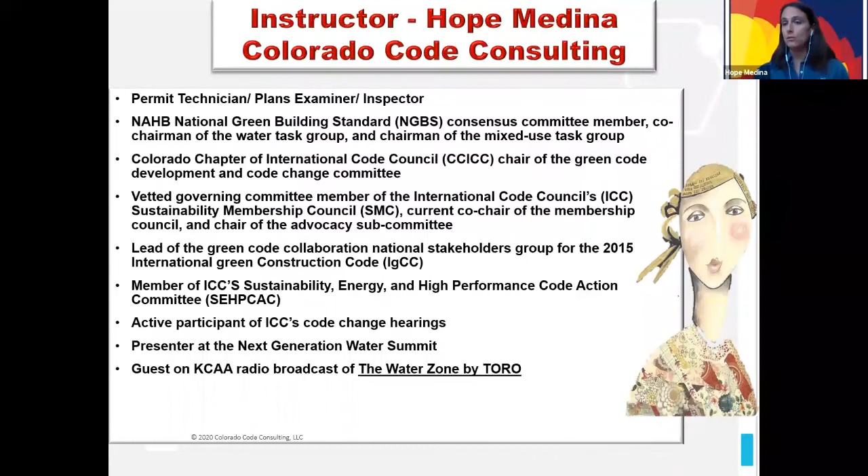So one thing I want you to keep in mind is the energy code really tries to get you to where you need to go. They try to create a pathway for you to get there. For that to happen, you have to make a decision as far as which energy compliance path you want to utilize for this project, because so many things are going to depend on what your choices are as far as the energy compliance path. Now you have a few options: your true prescriptive, your component alternative, and your performance path. And then you have the option that if you utilize ASHRAE 90.1, the 2016 version, then you are deemed to comply with the 2018.

Now, why is this so important? Because you as the architect are kind of the gatekeepers to these projects. You have to help facilitate the owner's dream or desire of what these buildings are going to be. But in doing so, you also have to juggle the other people involved—your engineers working on the MEPs, your soils guy, everybody involved with the project. You're kind of that gatekeeper, juggling to make sure that whatever the owner's desire is for this building, you can get it built under what the codes are, whether it's the building code, the energy code, whatever the case may be.

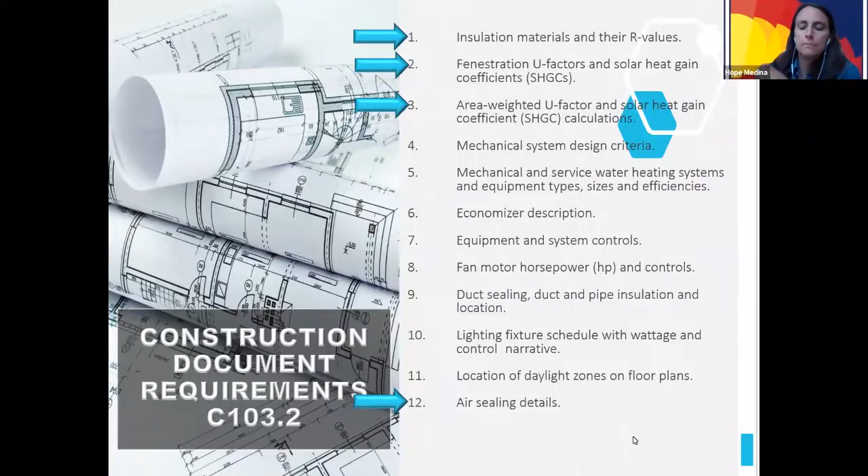Another one is your thermal envelope. I cannot tell you how many times I have to call this out. I've actually had responses back from architects when I've made the comment, please define your thermal envelope. I should be able to take my finger and trace it without lifting it.

I've had responses come back and say, well, it's all the exterior walls, and which would be fine. By code, you have to show it on the plans, and it's been in there since the 2015, and many jurisdictions actually amended it to be into the 2012 editions of the IECC. But there are some other provisions that come into play with it.

I don't know if you're aware, but mechanical rooms, if there is mechanical equipment in these rooms and they have outside combustion air being brought in, there's a few things you have to do. You may have to thermally isolate the room, or have it located outside of the thermal envelope. So knowing exactly where that thermal envelope sits becomes important.

One of the tips I'll tell you: often on that back wall is where the mechanical room is located, or in the corner, or what have you. Put a little note that says mechanical room, and then under it say no combustion air. That will do wonders for you in plan review, I'm going to tell you.

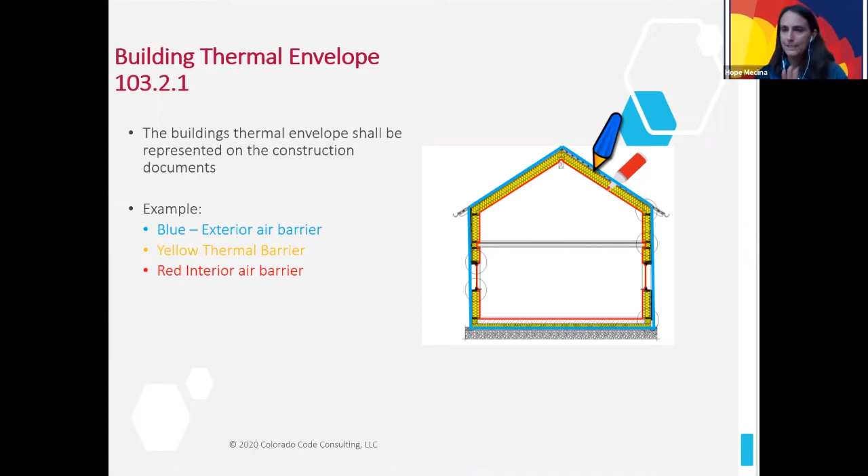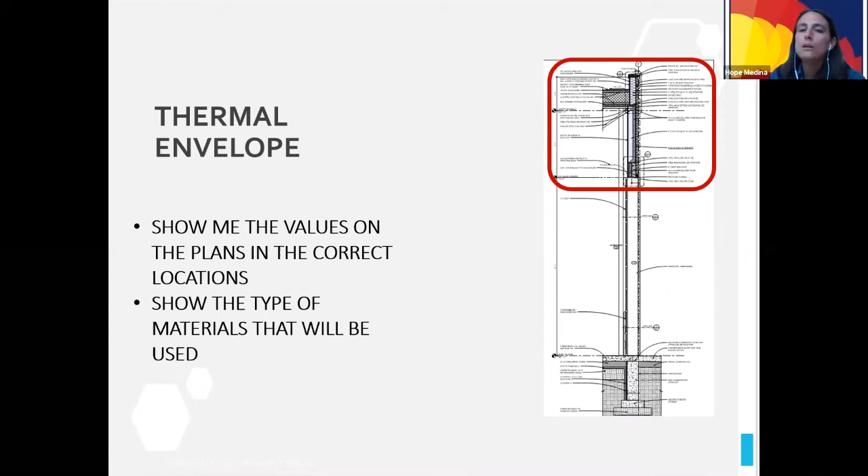So as we stated earlier, tell me what you're putting in for your thermal envelope. Tell me what the values are, make sure that they're in the correct location, and show me what type of materials that you're utilizing.

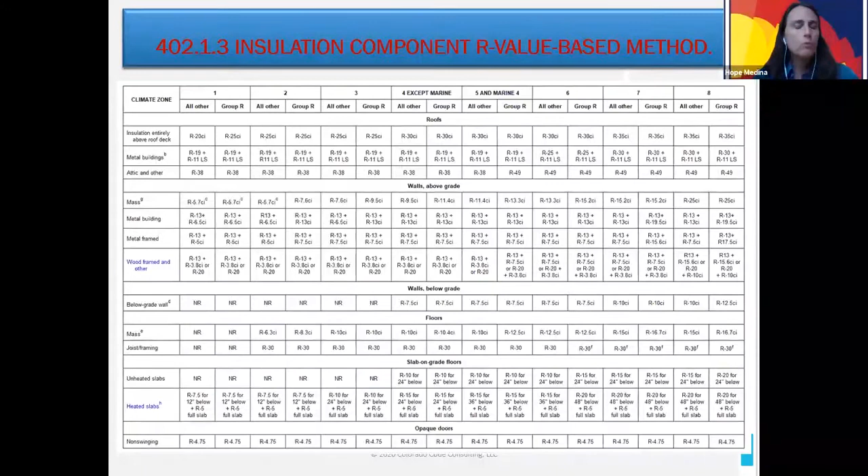So this is the table that all of the compliance paths and so many provisions within the energy code point to. Basically, this is your jumping off point right after you figure out which compliance path you're going to use. But to understand this table, we need to understand how it's set up.

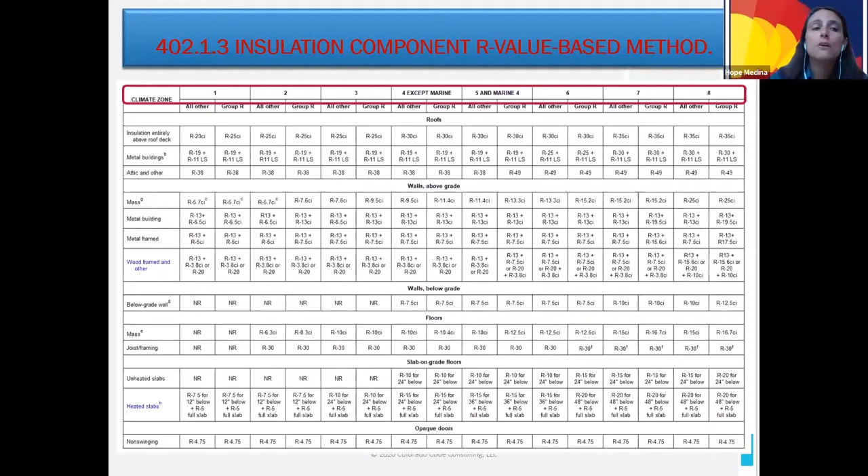The first thing you're going to notice is everything is determined by the climate zone. Which column you look at, how you're going to deal with things, whether you fall under exceptions - everything is done by the climate zone.

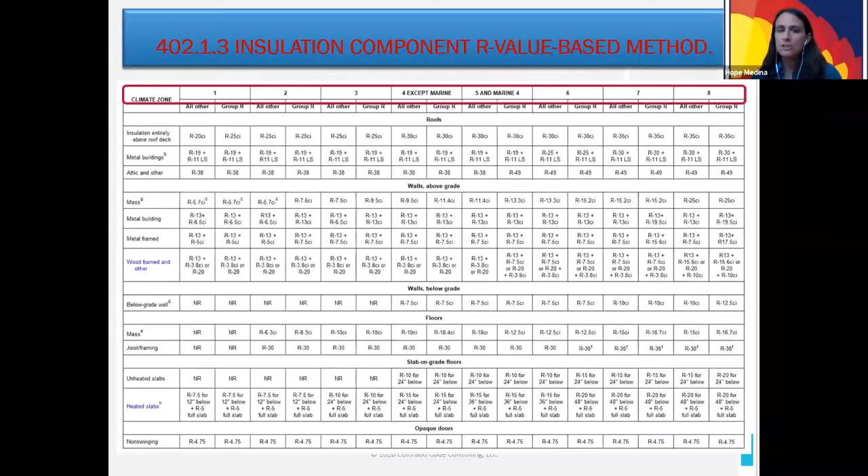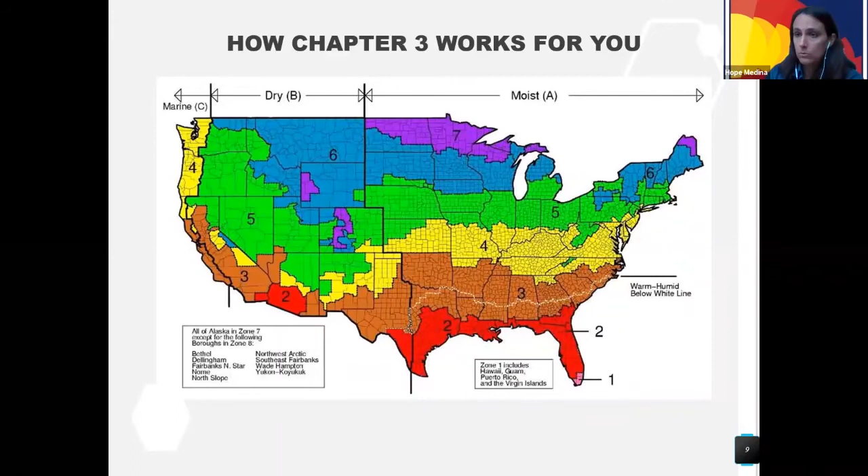So then what you're going to do is flip the page over, find the state, and figure out which county this particular city is located in. So if it was Alamosa, Alamosa County, you know that they're going to be a 6B. So now you know you're going to be looking into the 6th column.

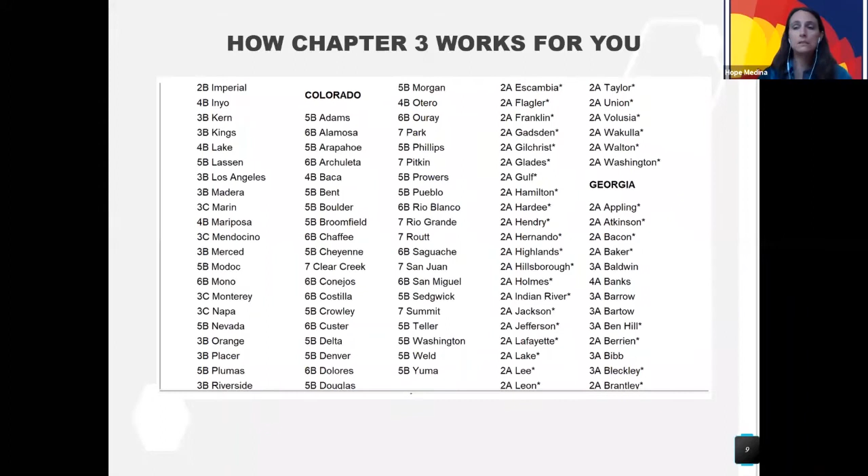So again, we have our climate zones, and then our climate zones are broken up into 2 more columns. We have our group R column, which is all your R occupancies - R1, R2, R3s, R4s - and then you have all other. So now you know you're in climate zone 1, it's going to be in R2, so this is the column that you're going to have to take a look at.

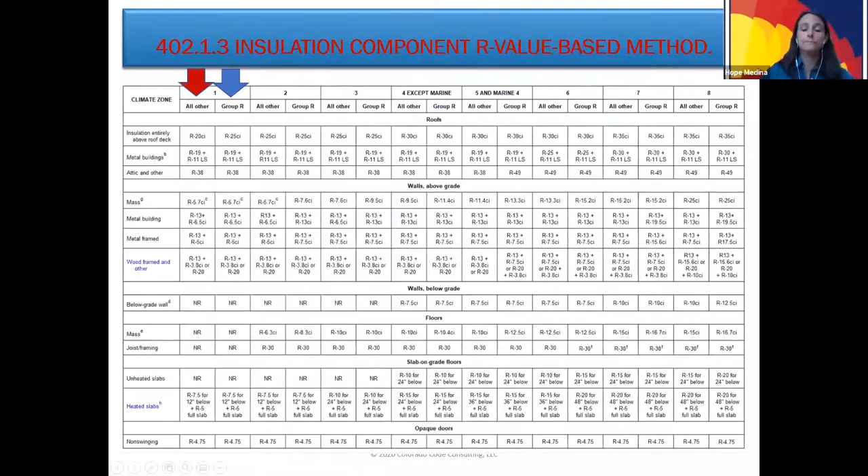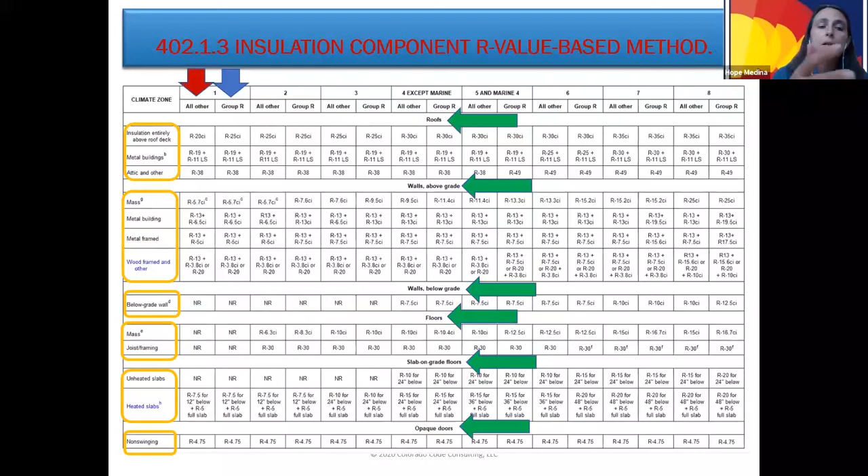And then it's broken up into very specific categories. So you have your roofs, you have your walls above grade, walls below grade, slab on grade, and opaque doors. And then it goes into even further information that starts to deal with the specific types of components that are in this type of category.

So if we took a look at the roof category, entirely above deck for a climate zone 5, you're going to be dealing with a minimum of R30 continuous insulation. Now, one thing I want you to keep in mind, if you do choose to go prescriptive - and there's absolutely nothing wrong with going prescriptive - you have to do everything that's listed in this table, and these are the minimum requirements for it.

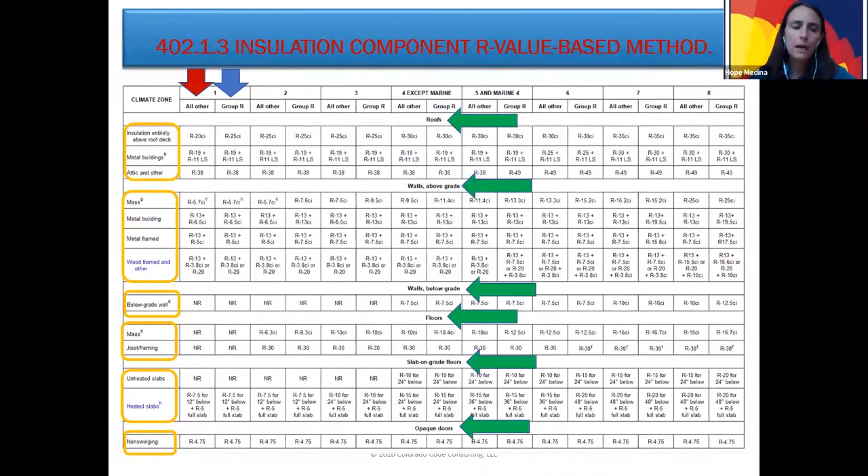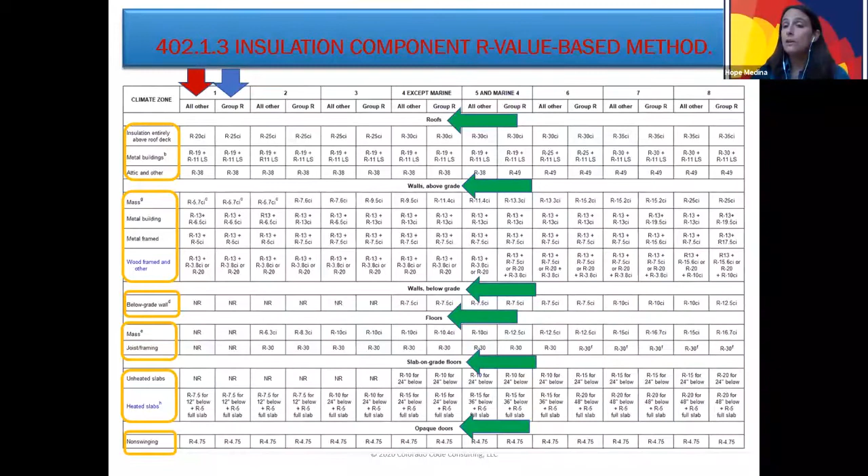So that means things like slab on grade - you can't trade off slab on grade if you're going prescriptive. So just keep that in mind when you are thinking about what type of energy compliance path really makes sense for your particular project. All right, now we're going to run into some of the actual provisions and what's the big hitter about them and what's the big deal about them.

So the first one we're going to talk about is our above grade wall insulation. I think everybody probably thinks about the pink in the wall and knows what it is, but there are a lot of things that can be involved with it.

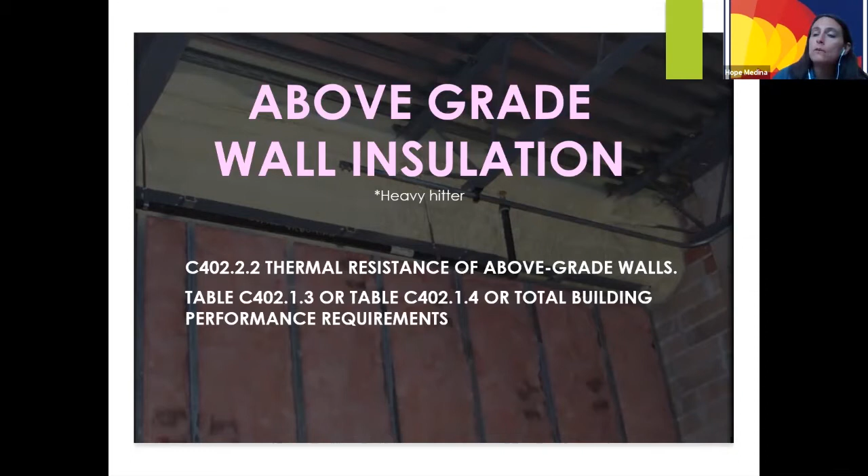You're going to want to make sure that you have your insulation values on your plans and what type of insulation that you're going to use, and make sure that it correlates with whatever compliance path you have. All this information needs to be provided to your mechanical contractor or mechanical engineer.

Because they're designing the mechanical systems to the values that you have within your thermal envelope. This is where it makes a big difference. It's not the actual insulation in the walls that saves the energy, it's part of the process for it. It's the mechanical work that's going to save the energy.

So if that mechanical equipment is sized appropriately, because there's actually a good thermal envelope involved, this is where you're going to start to see those energy efficiency components come in. This is why it's so important that the actual thermal envelope values not only are placed on the plans, but passed along to all the various entities involved, because this can make or break the type of mechanical system that's going to go into particular projects.

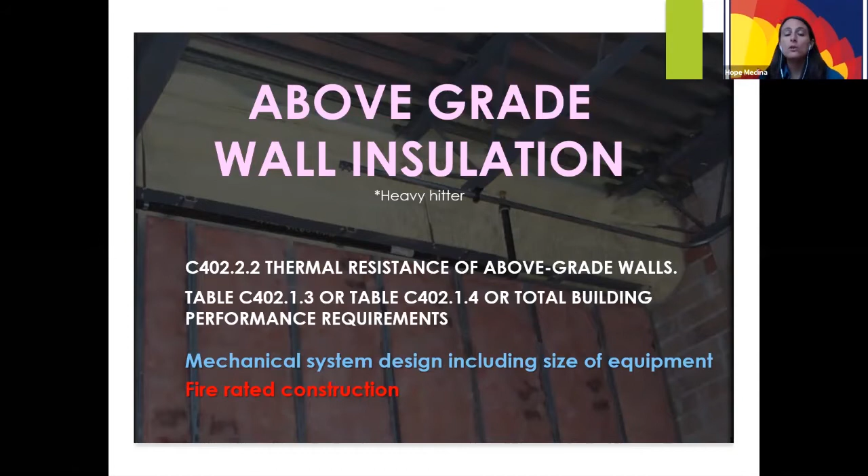And you have to remember too, this information becomes very important, especially when you start talking about fire rated construction. So let's talk about and look at what's involved when it comes to the above grade walls.

Now the table that you see on the top of the screen comes out of the R value table. The values that you see on the bottom are your U factor alternative approach, meaning that you're going to utilize the entire assembly to get to that U value and not just the insulation that's in the walls.

So if you notice, looking at the table at the top of the screen, they all say an R13, and then let's go to the very first column, it says an R5.7 CI. Now CI means continuous insulation for these mass walls. If you go to the metal building, it says an R13 plus an R6.5 continuous insulation.

If you notice, all of the above grade wall types are required to have continuous insulation involved with it. So if you go truly prescriptive, you are going to be required to utilize that continuous insulation requirement for your wall assemblies. Now there are a couple of options where it does allow for an R20 cavity.

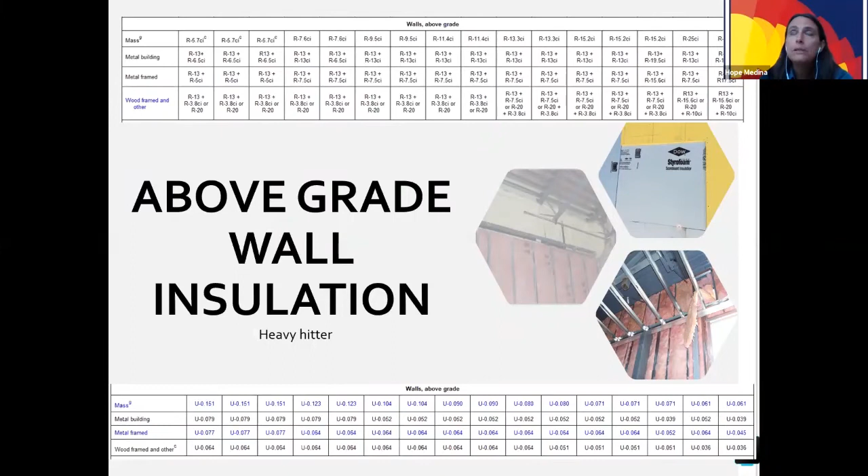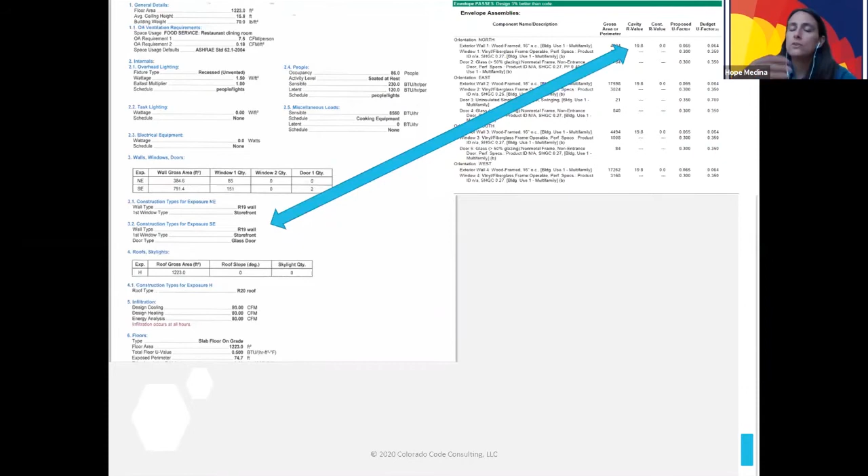And I believe that those will be removed when it comes to the 2021 code. But as you can see here, I wanted to give you an example. On the right-hand side, you'll see a very typical COMcheck that gives you the information as far as what you're putting into your thermal envelope.

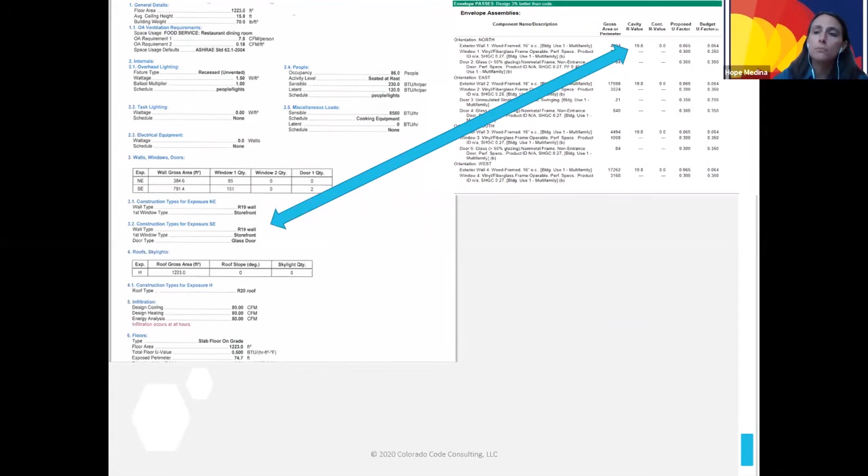And then it correlates over here on the left-hand side to what the mechanical contractor put in when they were doing their mechanical load calculations. And that determines the size of equipment that they're going to install for the particular project.

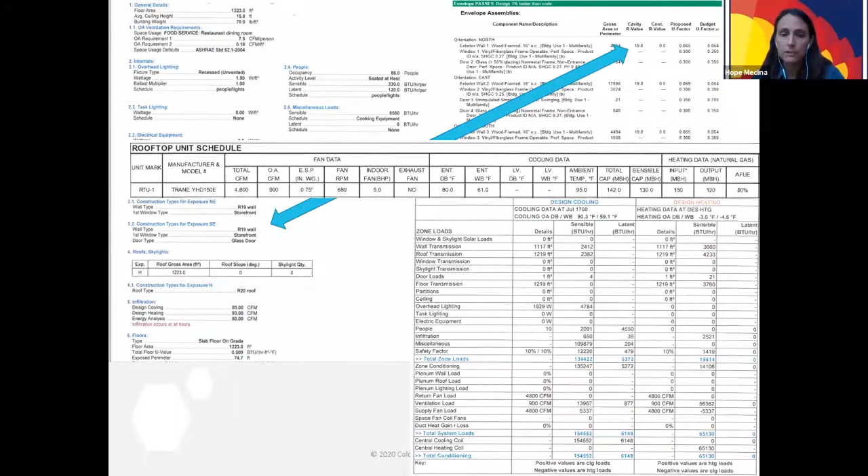Now, I mentioned to you earlier about fire rated construction and the thermal envelope, and the importance of this is, a lot of times people think that if it happens to be construction dealing with fire rated walls or fire rated assemblies, whatever the case may be, that the energy code loses out, that life safety supersedes the energy code.

And yes, the energy code is not allowed to abridge life safety, but that doesn't mean there's a complete exemption or doing away with anything you can do when it comes to fire rated construction. If you notice, on most listings for fire ratings, it has in there to utilize a minimum R13 batt insulation or something along those lines. There's usually a minimum of 3.5 inches or whatever the case may be.

You can incorporate that into your thermal envelope and you can still utilize it. You can go in there and say, it says a minimum of R13, so you decide we're going to put an R20 in the wall. Well, that's great, but if you don't put it on your plans, that wall is not going to have an R20 in it.

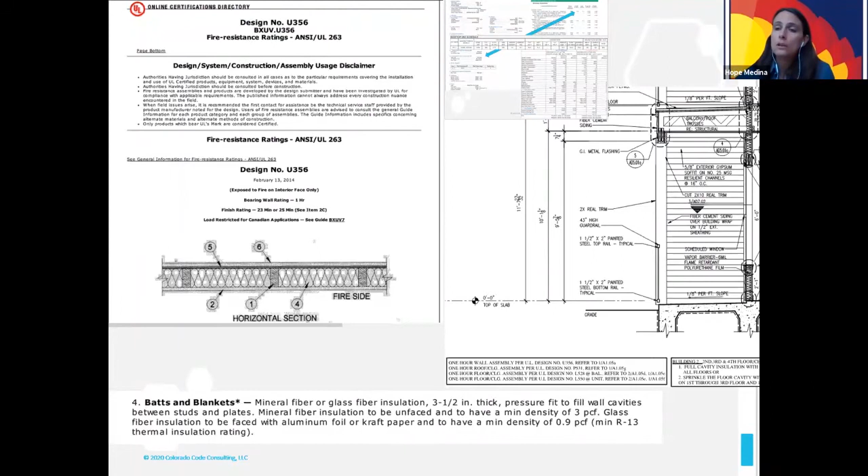What do you think the contractor puts in? They're going to put in an R13 because that's what the fire rated construction listing states—a minimum of an R13. It says R13 there. There's nothing on the plan, so I'm assuming we're going with an R13.

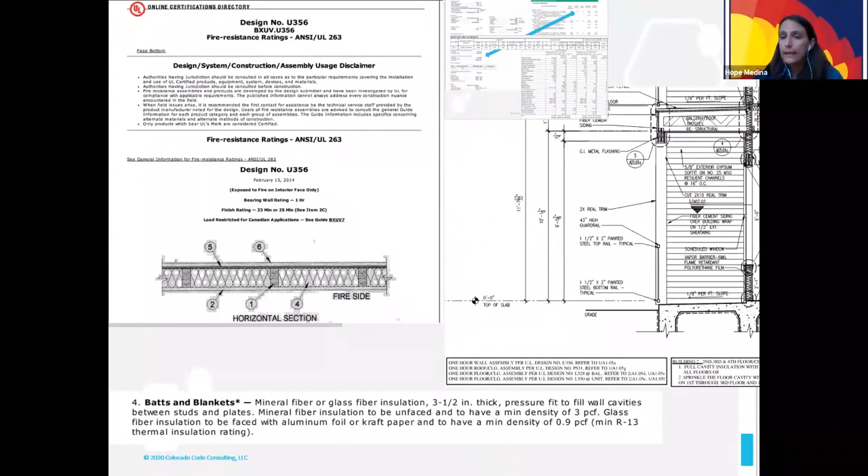Now, if you remember from the previous slide, the mechanical contractor did their mechanical load calculations for an R19. So now they may have sized their equipment incorrectly, and it won't actually perform the way it's supposed to, and it won't heat the building as it should. Just by one little omission, you can cause some snowball effects from it.

Roof insulation is a really big heavy hitter because, if you think about it, it either keeps the heat in or keeps the heat out. It is a really big, important heavy hitter, and so you need to know what it is that you're going to be utilizing.

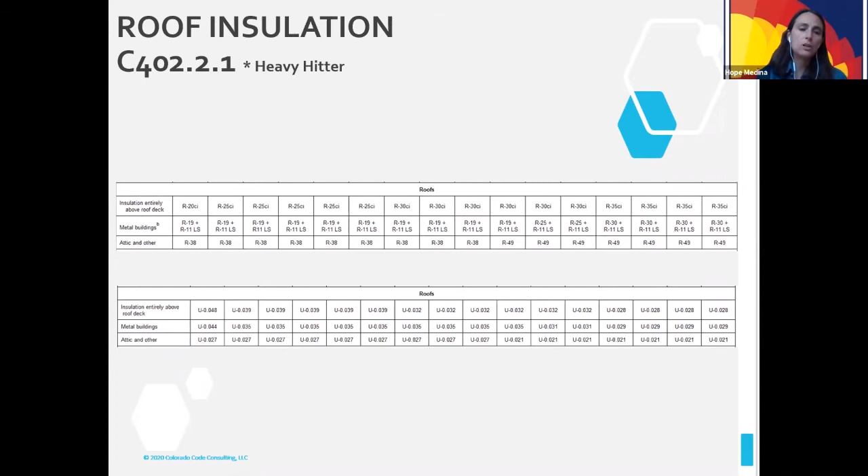So are you doing entirely above deck? Is this going to be a metal building? Are you putting it in the attic, very typical to what you'd see for residential applications? Whatever it is, this information needs to be placed in there.

Now, roof insulation has to meet the minimum values that you're going to find in there. And if you're utilizing multiple layers, you need to make sure that the joints and seams are staggered so that there isn't heat loss always at that same line.

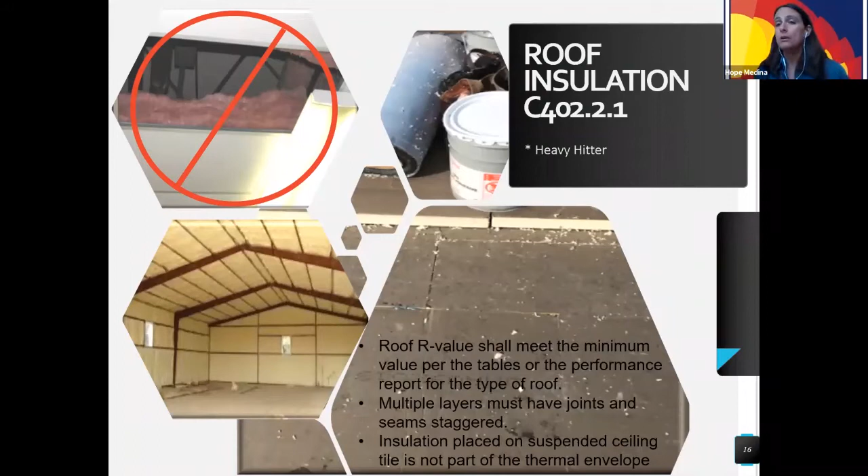And you need to keep in mind that insulation placed on top of suspended ceiling tiles is not going to be considered part of the thermal envelope. Now, you can have them there—there's nothing wrong with having them there. And quite often they get placed there, especially if it happens to be above a restroom, because nobody in the office next door wants to hear the toilet flushing over and over again. So that's not unheard of, but just realize that's not going to be considered part of your thermal envelope.

And keep in mind too, if you're going prescriptive and it's for a metal building, there are a few additional things you're going to have to keep in mind. You are going to have to utilize a liner system, and you're also going to have to utilize thermal blocks, and that information needs to be placed on the plan so that everybody is fully aware of it.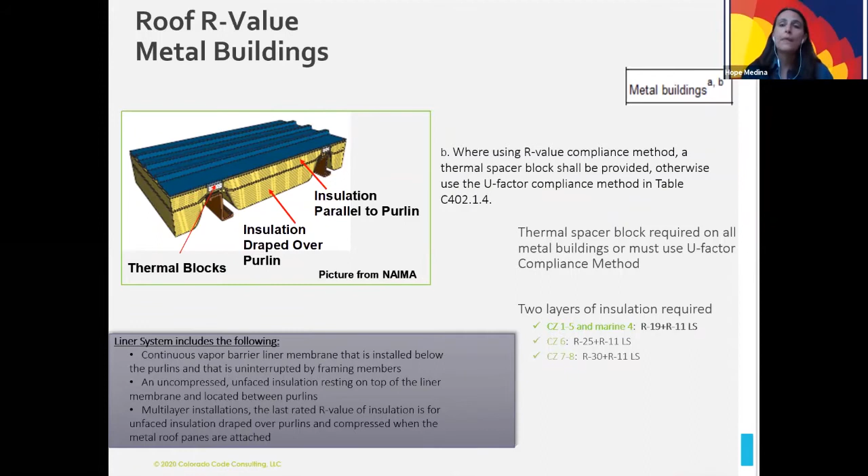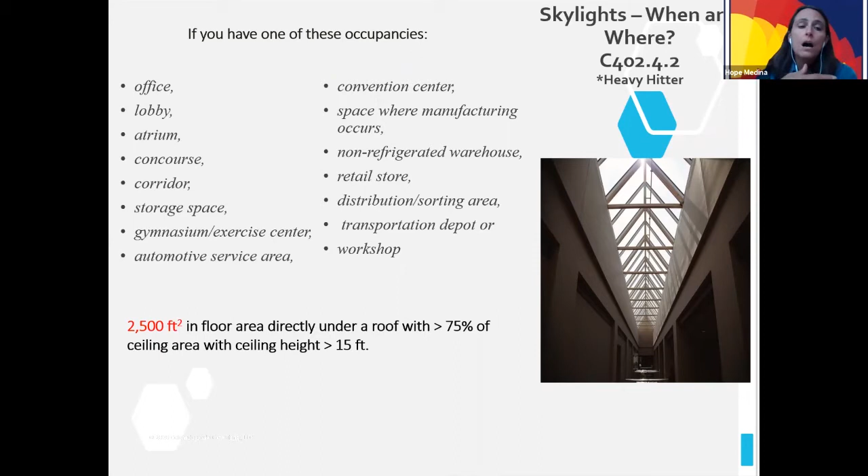And skylights—since we're already in the roof area, let's take a look at skylights. Skylights changed so that it is now required if the room directly under it has a ceiling height of 15 feet and it's at least 75% of that area, and that area happens to be 2,500 square feet, you're going to be required to have skylights in it. So the occupancies where you'll be wanting to install these are offices, lobbies, atriums—the whole gambit list you see up there. So that's something to be aware of.

You have to start from the top of the slab and extend down to the accepted distance or to the top of the footing, or your other choice is to start at the top of the slab, go down to the bottom of the slab, and then go horizontally for the remaining distance. But those are the ways it needs to be installed. Or you can place it on the outside of your foundation and place it there also.

Now, one of the questions I get is, well, there's a concern about placing the insulation between the slab and the foundation wall. And if you look at the soils report, or sometimes it's on the structural plans themselves, it'll say that there needs to be a control joint. I've talked to some engineers and they've said, yeah, you can totally use that as your control joint in those locations. Of course, I'm not advocating or superseding what your engineer is saying, but I have spoken to a few and they've said that in these types of situations, it's perfectly acceptable to utilize that.

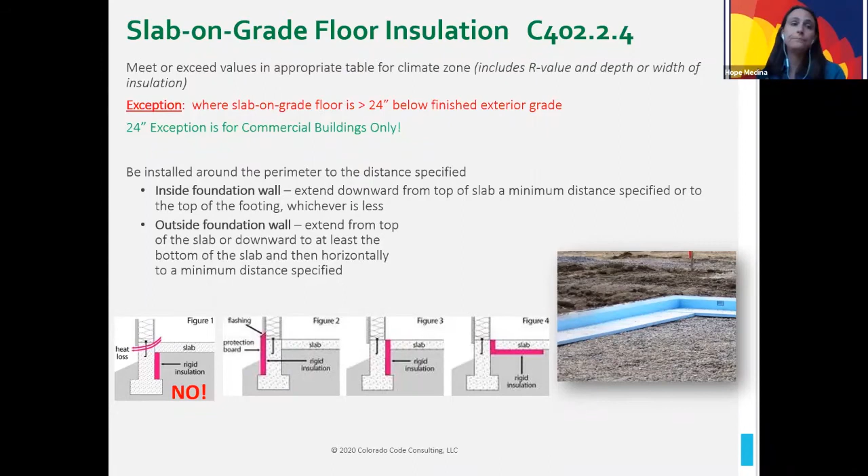Fenestration. Glazing is a huge factor when it comes to energy efficiency. And there's a lot of things that kind of wrap around when it comes to the fenestration requirements.

There's so many factors that are actually going to be determined with it. The location of where these windows are placed in the building and what they're facing is going to determine your solar heat gain coefficient requirement. So orientation is going to matter, and you need to make sure that that ever so lovely north arrow that's required by code to be placed on there is there so that everybody's able to determine it.

And then it's your projection factor that's also going to come into play with it. So if you have a projection factor of 0.2 and it's facing north, for climate zone 4, your maximum is going to be a 0.48. So these are things that are going to be important.

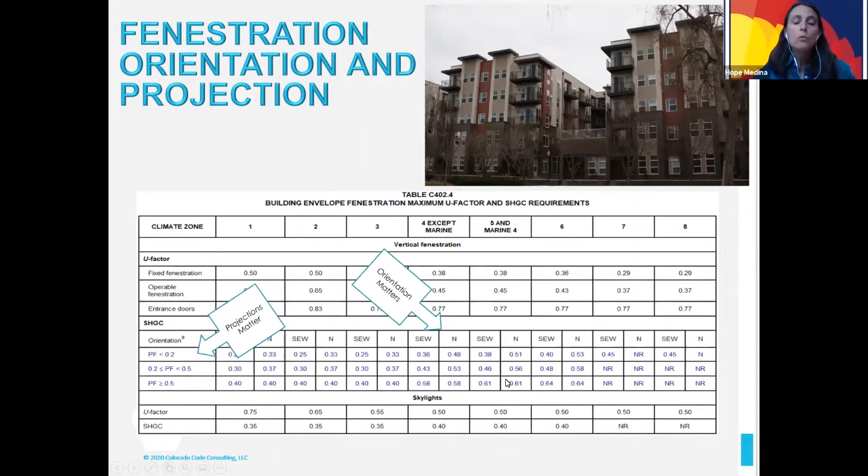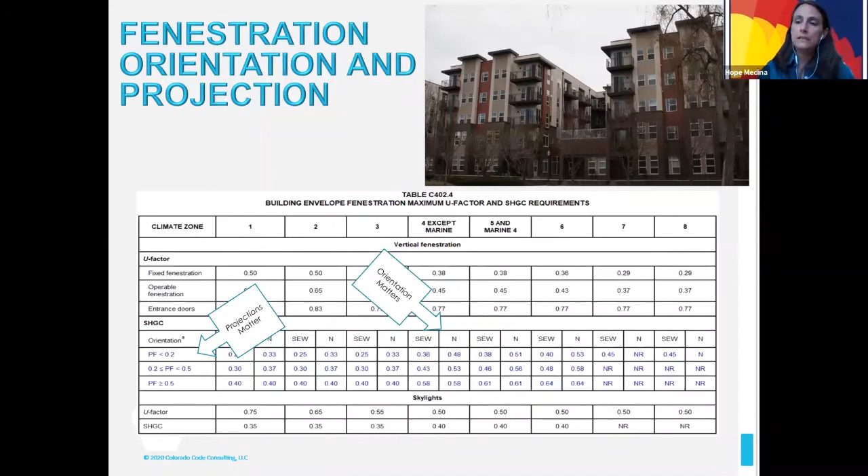What I can tell you is code officials are a lot more aware of the projection factor issue and making sure that they're getting the correct information as far as what the solar heat gain coefficient will be. Now I've seen where they take the most restrictive, we'll say for climate zone 4, the most restrictive is going to be the 0.36. So I've seen where it's placed on the plans that the maximum solar heat gain coefficient for any window is going to be a 0.36. Even though it's not very specific, at least I know that we're not going over that.

Just so that everybody is completely aware of how to determine the projection factor, you're going to take the bottom of the glazing to the underside of the projection or the overhang, and then you're going to take from the face of the glazing out to the edge of it. And the horizontal is then divided by the vertical, and that's going to give you your number.

So if A happens to be 30 inches and then B happens to be 84 inches, we're looking at a projection factor of 0.36.

Now, like I said, because code officials are more aware of this due to all the training that has happened in the last 6 months with our lovely situation of dealing with COVID, don't be surprised if you get asked about what your projection factor is for some of your glazing. That may be something that comes up.

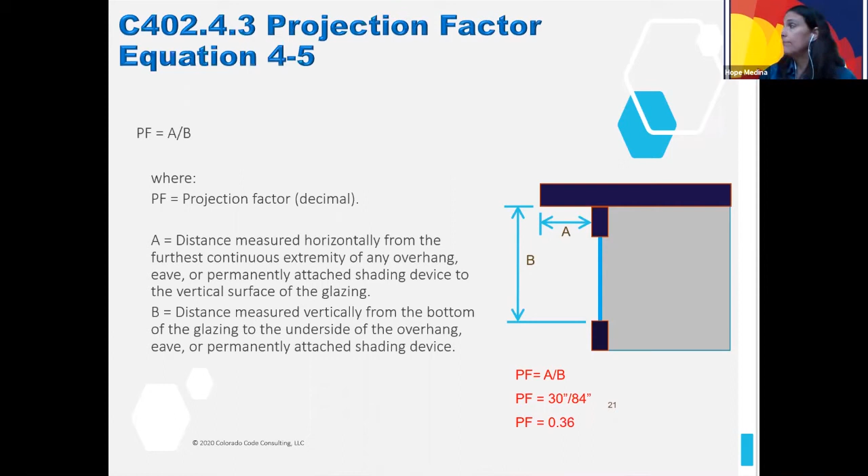Another thing to be aware of is when you're submitting plans, provide the NFRC labels so that they can determine whether or not the framing and everything is going to be within code parameters.

The other item that you need to make sure of is about your glazing leakage. This happens to be one of my biggest pet peeves, and some of my local restaurants know me quite well and know not to place me at a window because their air leakage is so crazy that there's no reason I should be sitting there with the blinds moving from the amount of air that's coming in just from the air leakage. So please be aware that you need to have this.

The question becomes, do you place this on the plans or do you place this in the spec book? A lot of times I hear, well, I place that information in the spec book, and there may not be anything wrong with that.

What I find in the spec book often is just a lot of boilerplate information. It's not even necessarily specific to the project. And what I often have to call out is that because these don't get looked at and updated often, the information in there, like for your piping insulation, goes back to the 2009 requirements and is not to the '18 requirements that were changed.

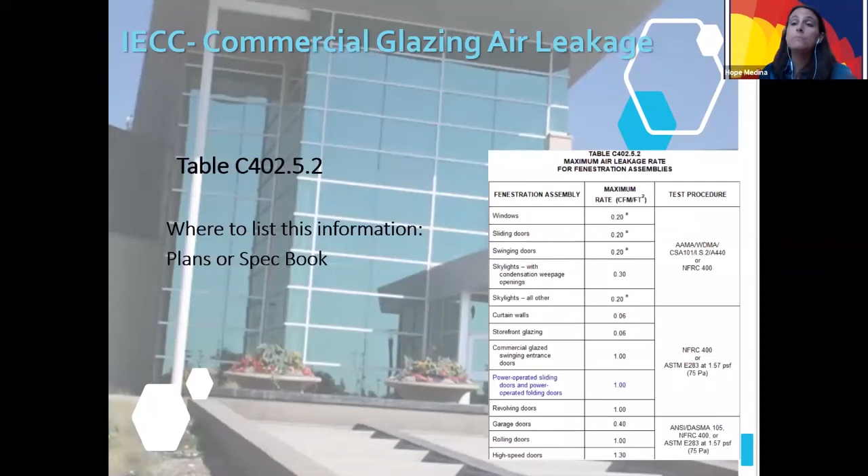There are a few other things I've noticed consistently that haven't been updated. So make sure when you start talking about the piping insulation or the thermal dynamics, whatever the case may be, that it is updated to the latest code cycle.

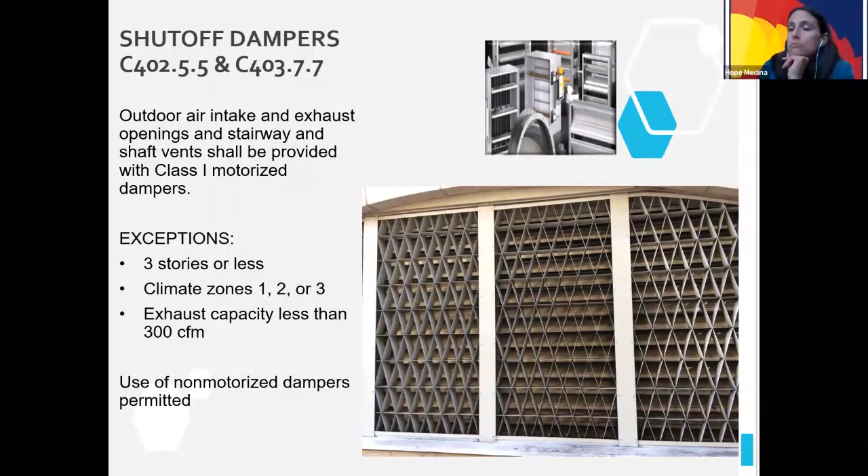I've had a couple times where the dampers actually hadn't been provided on the plans by either the architect or the mechanical engineer - just something that was overlooked.

Air leakage. Earlier in this webinar I said we'll get into this in more detail, and here's where we're going to go.

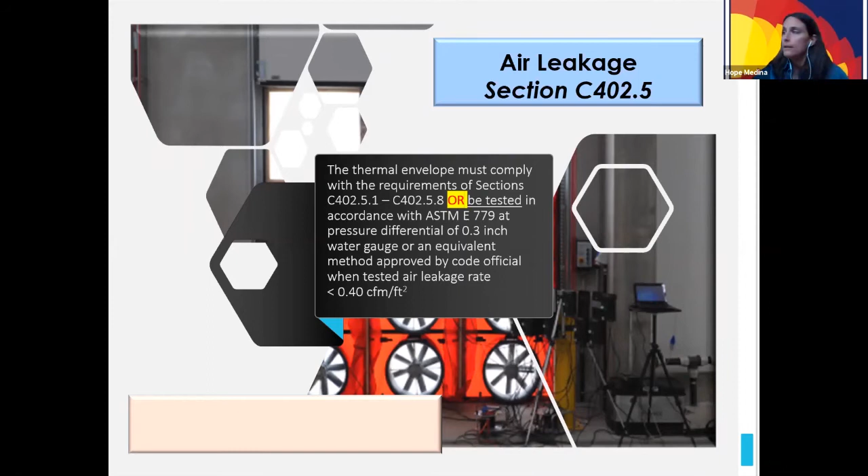When it comes to air leakage, you have a lot of options. You can either utilize the prescriptive path, where it tells you to do this, this, this, and this, with some options even within that, or you can do basically a blower door test for your project. You can do one or the other, it doesn't matter, you have those options. The only thing I'll say is really be aware that the air barrier cannot be an afterthought, and make sure everybody is on the same page when it comes to that.

This is one of those times you may not want to just place it into a spec book as far as what you're going to do. Call it out on your code analysis - have an energy code analysis that provides some of that information. I'll talk about that later, but provide information that says, hey, we've chosen to do a blower door test for those particular areas, which still allows you to have the choice.

Whatever it is, you need to make it quite clear, because here comes a situation where it wasn't expressed really well, and it became a problem out in the field.

In this jurisdiction, this particular inspector had done the plan review for this project and knew the team had chosen to do air leakage testing as opposed to the prescriptive path for the air barrier section. She was really excited and looking forward to it - she happens to like energy like me, so she's an energy code geek too.

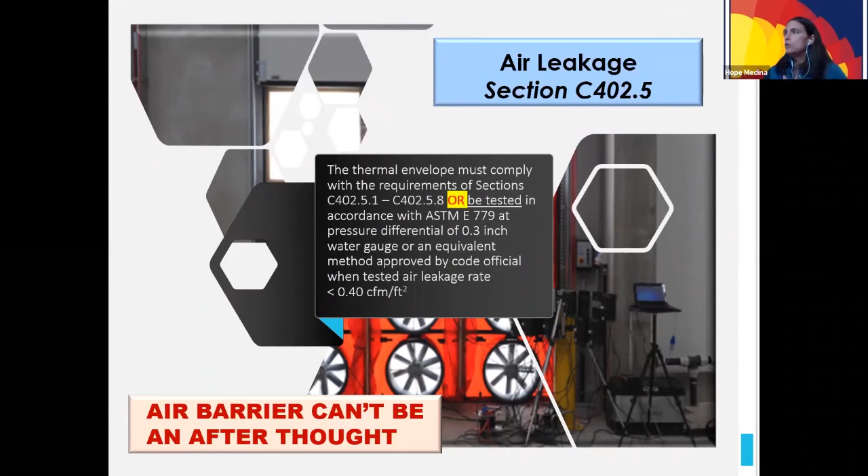So then a lot of things happened - a lot of miscommunication, a lot of 'what are we going to do,' a lot of phone calls and discussion. So just save yourself from having to do that - make sure that information is clearly placed.

Air barriers have to be continuous, and they're required for all climate zones except for 2B. Don't ask me why, I don't know why 2B is so special, but it doesn't have to have a continuous air barrier. The air barriers can be located inside the thermal envelope, outside the thermal envelope, or be a combination of the two.

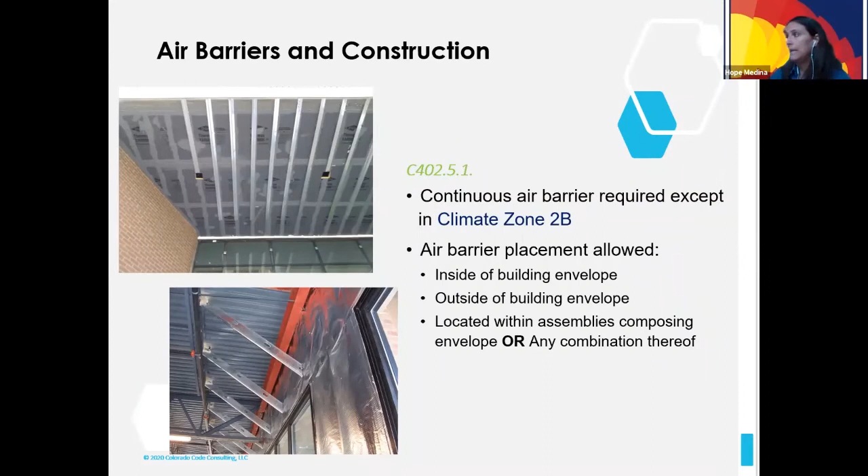They need to be continuous for the entire assembly of the thermal envelope, because they work together. The insulation is your thermal barrier, and the air barrier keeps the air from coming in and removing that, because when air movement passes through the insulation, that actually takes the R-value away.

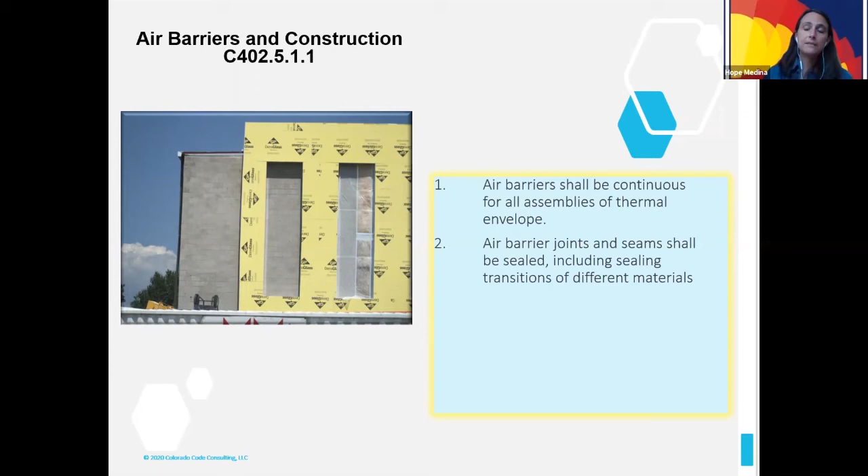You're also going to need to make sure that all the air barrier joints and seams have been sealed, and that they're able to deal with the different types of materials being utilized. This is probably one of the areas I make comments on. What are you doing? What are you going to utilize? Tell me what your air barrier system is going to be, and how you're going to seal your joints and seams, because often they'll say, well, I'm going to use my sheathing. That's perfectly okay, perfectly acceptable. Use your sheathing, but how are you going to seal it? Because all those joints and seams will still have to be sealed. Those are little details you're going to want to keep in mind.

Recessed lighting has to be IC rated and gasketed if located in the thermal envelope. I think that's almost a gimme nowadays. It's really difficult to find recessed lighting fixtures that aren't IC rated. Usually they have that little sticker that says energy code compliant or IECC compliant. The electrical manufacturer industry really took the energy code and ran with it, and made it really easy for all of us to comply with it.

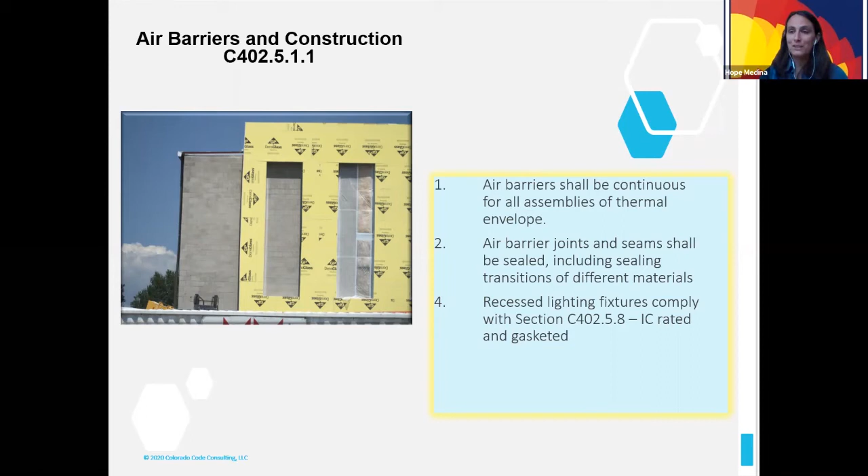The other thing to keep in mind is all the penetrations that are going to go through that air barrier, because no matter how perfectly you design it, there's always going to be something that happens out in the field. Oh, we have to move that pipe, it has to go through here. Or the inspector comes out and says, nope, that opening is too close to that window, it has to have a 3-foot distance, you're only at 2 feet, you're going to have to move it. Whatever the case may be, something always comes up. So provide them with a contingency plan: this is how you're going to address any penetrations that happen within that thermal envelope.

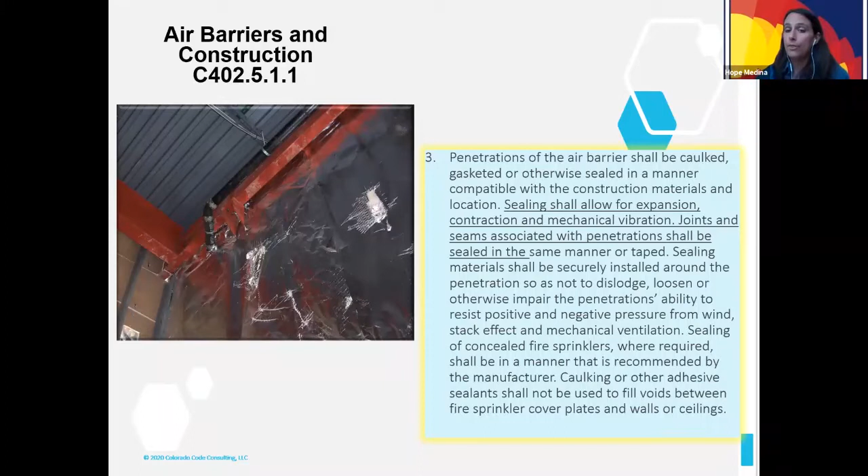Something you've got to keep in mind too is sprinklers. If you have concealed sprinklers, you're going to need to provide the manufacturer's installation instructions on how they're going to be installed to meet the air barrier requirements. Each manufacturer is supposed to provide that information on how to address it. That's all the information I can give you, but they're not supposed to be sealed. Code officials and contractors are more aware of this now, so I wouldn't be surprised if you get asked to provide this information.

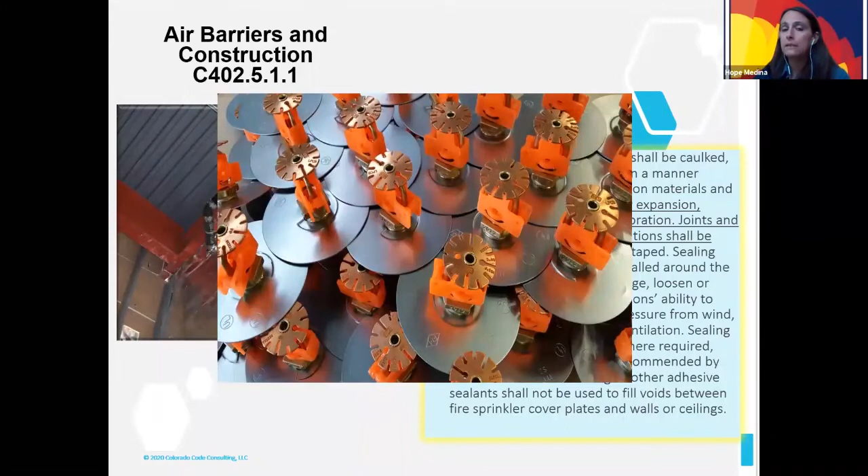So you have two options as far as how you can comply on the prescriptive side of air barriers. You can either utilize the material, or utilize the assembly. One of the things I want you to keep in mind is you can use single ply roofing, OSB, plywood, drywall, the whole nine yards.

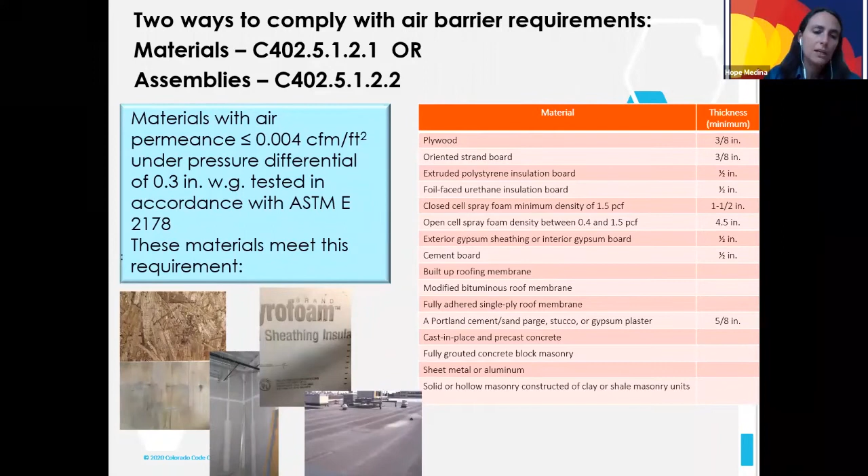The one thing not on that list is house wrap. House wrap was designed and intended to be a water resistive barrier or weather resistive barrier, not necessarily intended for air barrier applications. Now there are water resistive materials that have been listed and labeled to also be air barrier materials. But if you say, hey, we're using Tyvek, which can be utilized for both if you install it per the manufacturer's installation instructions, you need to provide those instructions, and it would be absolutely perfect if you place that little paragraph on the plan, since it's not long as far as how it has to be installed. That way there's no question on how that air barrier system needs to be installed for that Tyvek wrap.

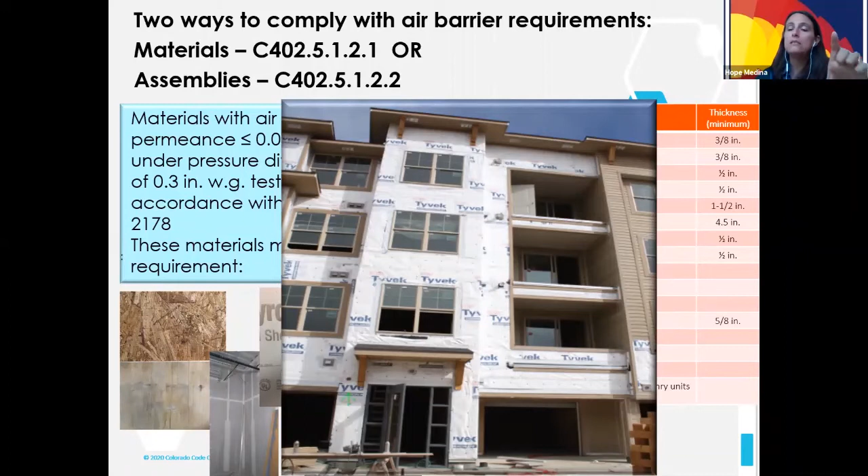Now the other option you have is if you were to utilize an assembly.

Why are air barriers so important? Because there's a lot going on with that. In 2021, there are requirements coming in for a building envelope performance verification. In that verification, a third party will come out and verify that the insulation was installed correctly and that there was an air barrier. Remember, when it comes to the building thermal envelope, it's not just the pink in the walls, it's the whole system as a whole. So that's going to be a requirement. It's still a visual inspection at this point, but it is required to happen, and there's commissioning reports that will be required for it in the 2021.

I said it's the 2021 code, but there are quite a few jurisdictions here in Colorado that are taking that provision for the building thermal envelope verification and bringing it into their adoption for the 2018 IECC. So it has the 2018 stuff, but they're bringing some things in from 2021. I believe Denver has done it, Fort Collins, I want to say Boulder, but there's quite a few already requiring it, and quite a few others looking at it to start requiring it with their 2018 adoption. So keep that in mind—you're going to have to be more cognizant of providing that information on the plans.

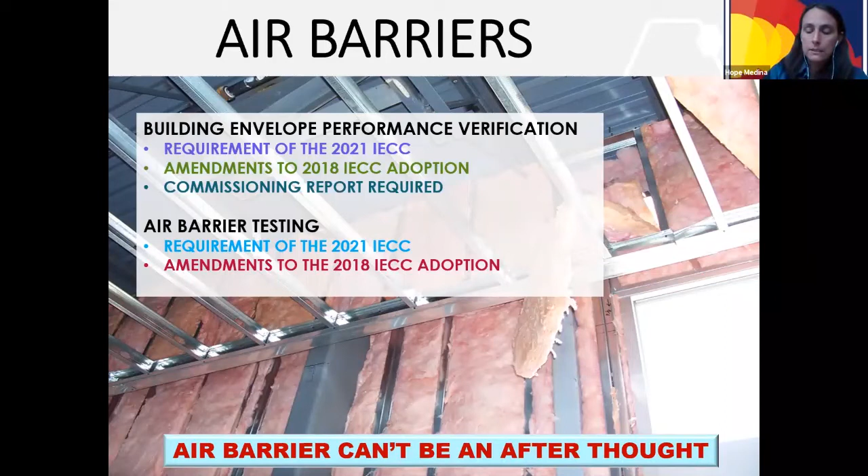Now, how many of you knew that there were energy requirements when it comes to elevator cabs? A lot of code officials were not familiar that elevator cabs had energy code requirements, but there are. So you might want to make sure that when you put in an elevator, these requirements have been met and the cabs have this information. Most manufacturers can give that to you, not a problem.

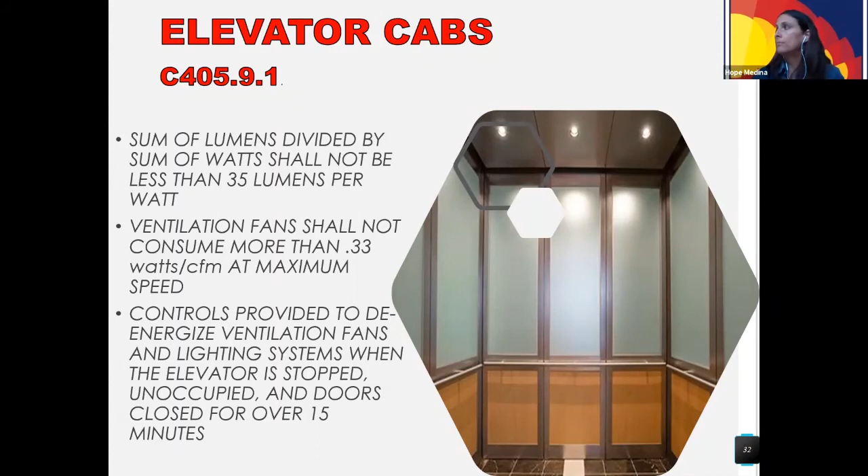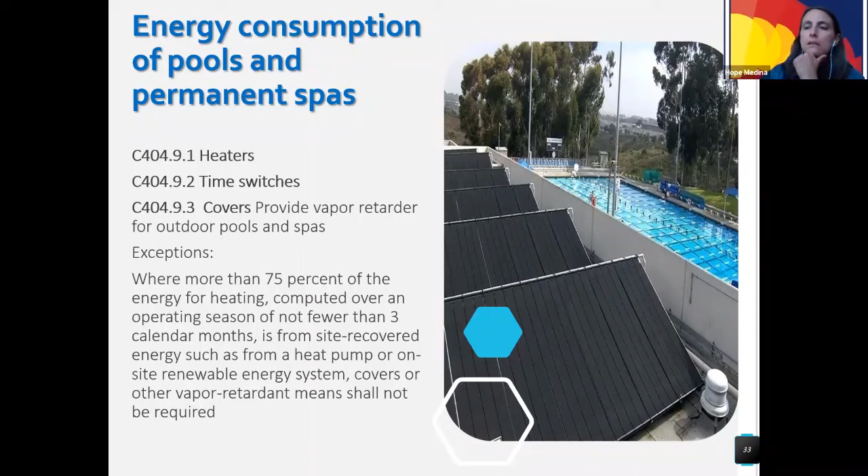Another one is swimming pools. Swimming pools and spas have energy code requirements. There's requirements for the heaters, for time switches, and covers. That's probably more in the area you would be involved with, maybe the covers. So just keep that in mind if a pool or spa is coming in, since you are kind of the gatekeeper of the project. Say, hey, what are you doing to meet the energy code? It might be a nice little catch now instead of getting a review comment for it.

Another one is for the I codes. All the appendices do not apply unless they are adopted. So keep that in mind, but you can always use an appendix if you're going to use it as an alternative method, and it becomes a great backing point for you when you say, hey, I want to do this and I would like to utilize, we'll just do this one, Appendix Ca, and this is why. So keep that in mind when you're doing alternative materials, that there are a lot of things going to assist you, and utilizing appendices that already exist is a good one.

But Appendix Ca happens to be the solar ready zones. Solar is a big hit word, I guess, but there's a lot of solar provisions going around. If you had the chance to listen to the energy code hearings, you probably got to hear an awful lot about solar, whether it should be in the energy code or not, the whole 9 yards. But this is in the energy code, it's in the 2018. And I can tell you there are jurisdictions that did adopt the 2018, which included utilizing Appendix Ca. So there are jurisdictions out there in Colorado that are already requiring this.

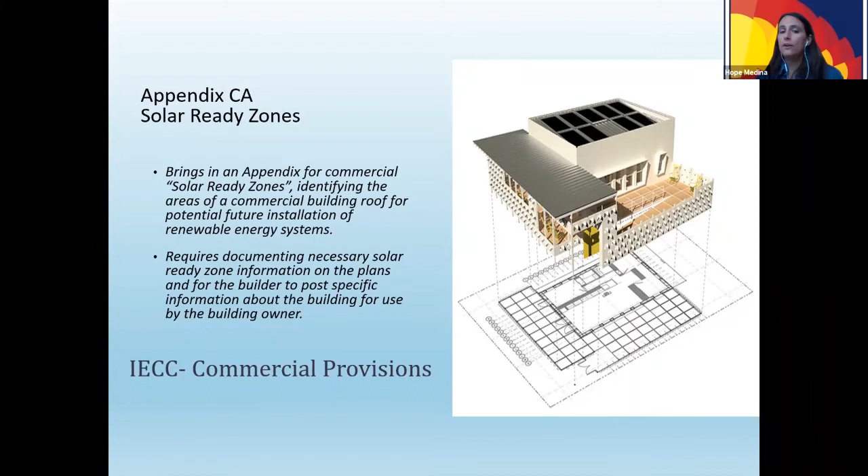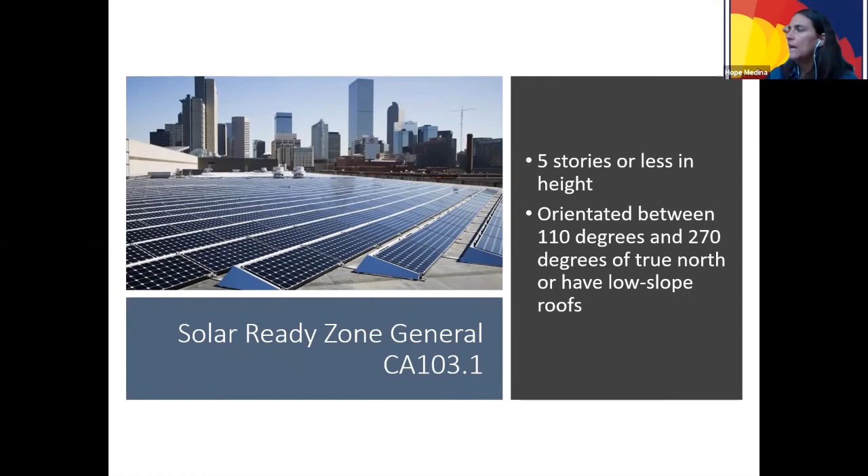So there are a few things. You're going to have to demonstrate where your solar ready zones are, and you're going to need to provide all the documentation for that. This is required for buildings that are 5 stories or less in height, oriented within those particular degrees, or have a low slope roof, which many commercial projects do, most of them probably that flat roof type. So you're going to need to designate where this solar ready zone is, and it needs to be not less than 40% of the gross roof area, but that doesn't include things like skylights or a vegetative roof.

You don't have to have a single area, you can do sub areas. And you just need to make sure wherever those areas are, they have to be free of obstructions, meaning this is information you're going to need to relay to the mechanical guy and to the plumbing engineer. Because they're going to need to make sure they don't have any vents or pipes or exhaust ducts located in these quote unquote solar ready zones. Those are free of anything.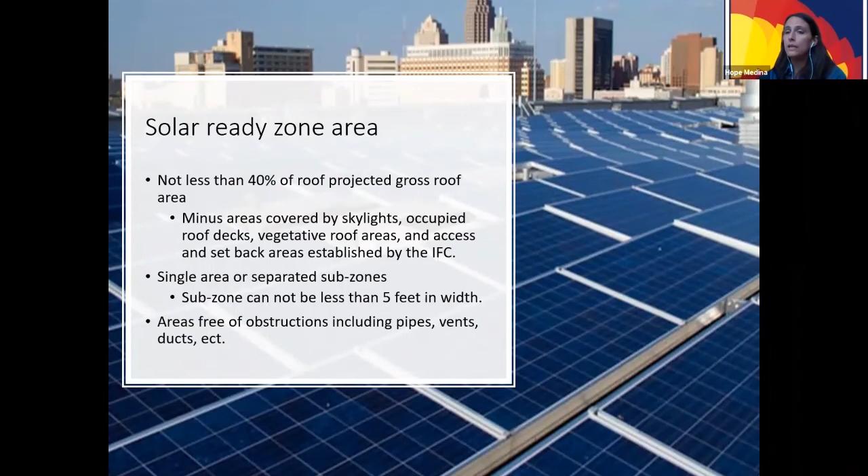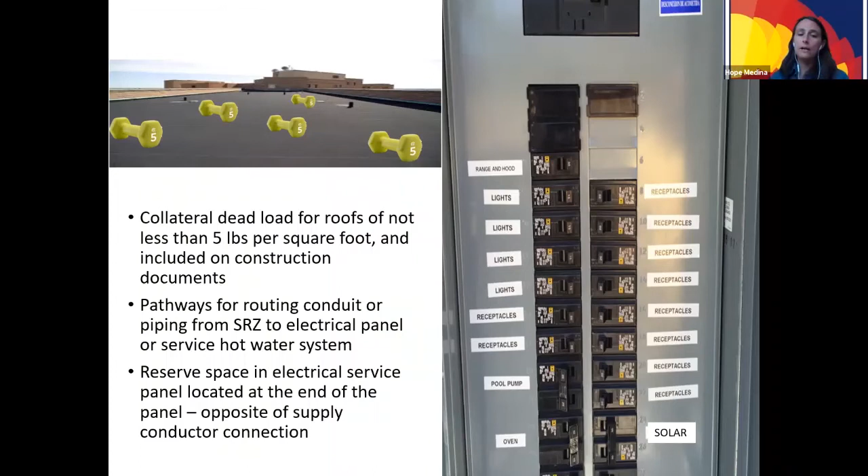You're also going to want to make sure the roof has been designed for that additional load, and they call out for 5 pounds per square foot. You're going to need to make sure there's a pathway for routing the conduit, and that there's space within the electrical service. A lot of this is where you need to make sure this information is placed on the plans, very defined where that solar ready zone is located, and that the conduit pathway is there, so there are no questions if they do decide to install the solar, especially when dealing with locations like, I'll say it again, Denver, that has the green roof initiative that went into play.

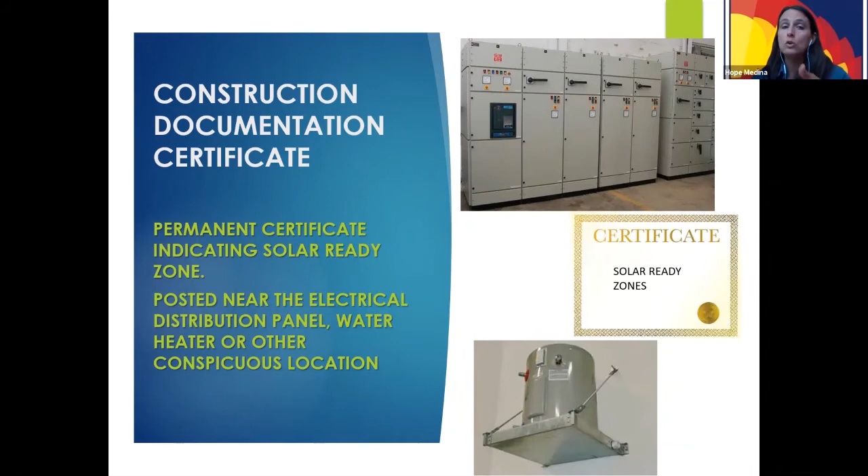One of the options to deemed to comply would be to utilize solar. This may be something more prevalent in Denver, but it is going to be utilized. There are a lot of communities right now talking about wanting 100% electrification, and one of the ways to get there is utilizing solar. So they are recognizing it. They may not adopt some of the other things, and their idea for electrification may be down the road, 2040, 2050, even 2030, but to do that they realize these buildings are going to need that capability. So you're going to have to make them solar ready.

Just keep in mind that if you go with the prescriptive path, you are going to be required to provide an additional efficiency package. If you choose to do reduced lighting power density, which is the easiest one, just make sure everybody is on the same page, because they are required to give us a COMcheck mechanical and interior lighting compliance report. Those are the easiest reports to provide for the requirements because they can just print them out and give it to us. Everybody's good with it, everybody knows how to read it.

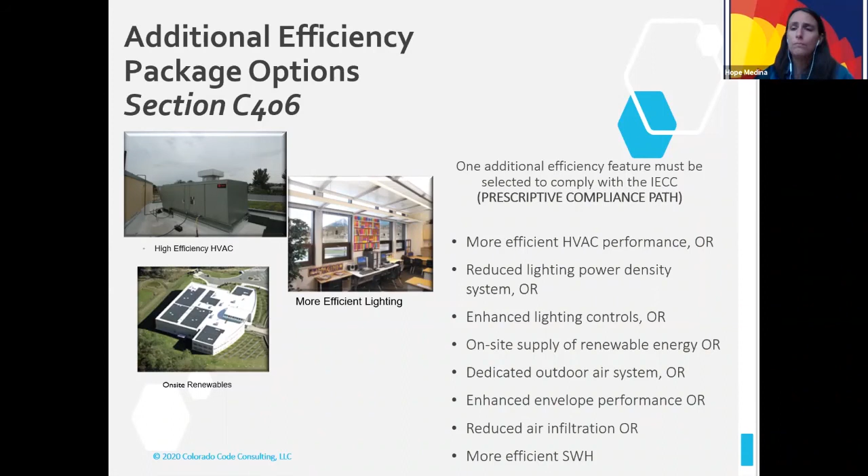But make sure everybody's on the same page and agrees, yes, we're going to do reduced lighting power density, because there's nothing worse than a runaround where you've chosen enhanced lighting controls, they chose reduced power density, and the mechanical guy says no, we're going to do more efficient HVAC equipment. I don't care what it is, just pick one, make sure everything stays the same so there's no question about what's going to happen. So my thought is just make sure everybody and everything is on the same page. Make it as easy as possible for everybody to get what you designed into reality, out there and working and functioning as you envisioned.

Thank you, Hope, that was terrific. You must have just answered any questions anyone could possibly have, because the Q&A is empty right now. But thank you so much, you did a great job presenting. Well, thank you very much for having me, I appreciate it.

We actually just got one question from Margaret Blakely, who asked if you could touch on fire sprinklers again. So, fire sprinklers, if they are concealed fire sprinklers and happen to be within the thermal envelope area, the manufacturers should have instructions for you and everyone involved that tell you how they want it addressed, whether it's tenting those within the thermal envelope or whatever the case may be, but they have to tell you how they want their specific product utilized.